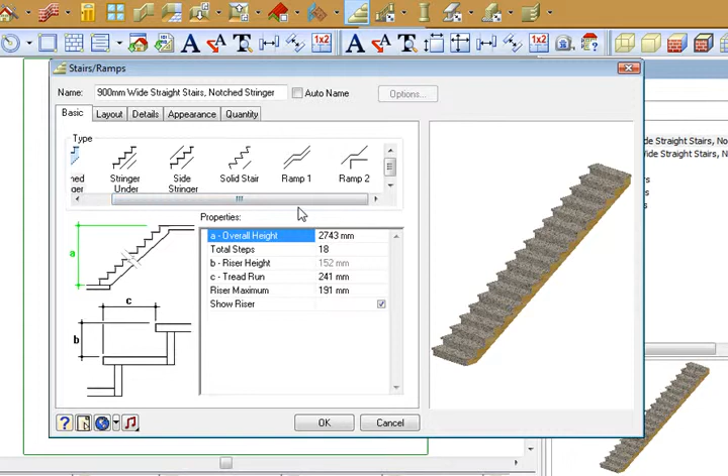So that's where you create ramps. Under the layout you can have a straight flight or a spiral to the right. I find that this list is quite confusing, so if you push the button underneath it you'll then get a series of diagrams that is much easier to select from.

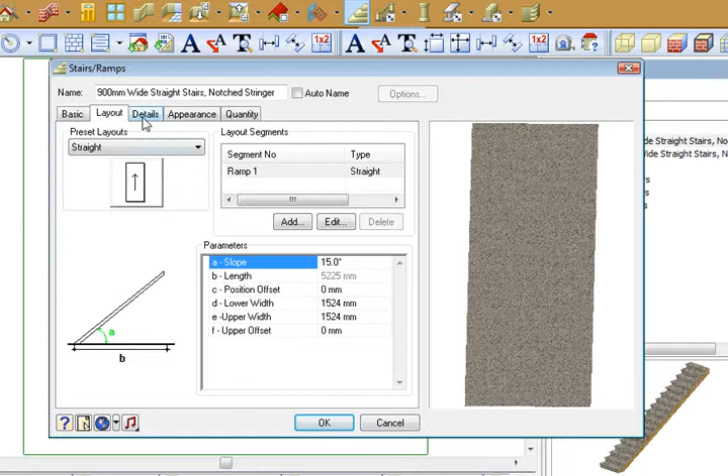The details of the stairs, you can go through and say, okay, I want to show the cut lines or I don't want to show the cut lines. What the cut lines are is how it's sort of cut on your floor plan view. So if I turn those cuts off, it won't appear.

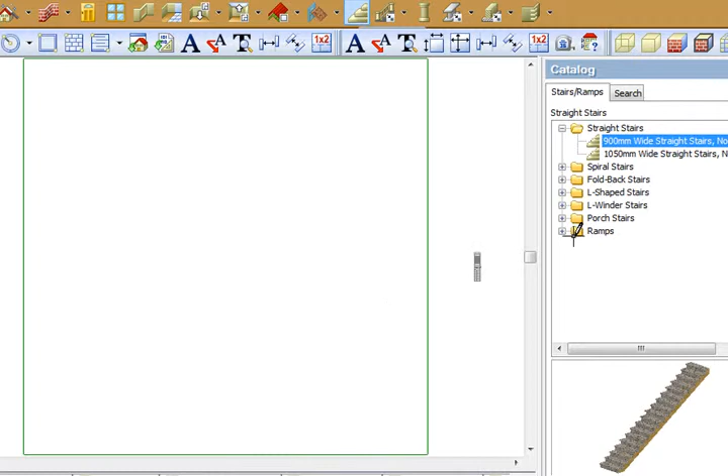So basically, it doesn't matter what sort of stairs you want, you can just bring it in and pick a point on the building, on the floor where you want it. What I tend to do is bring a straight flight in and then go and change it.

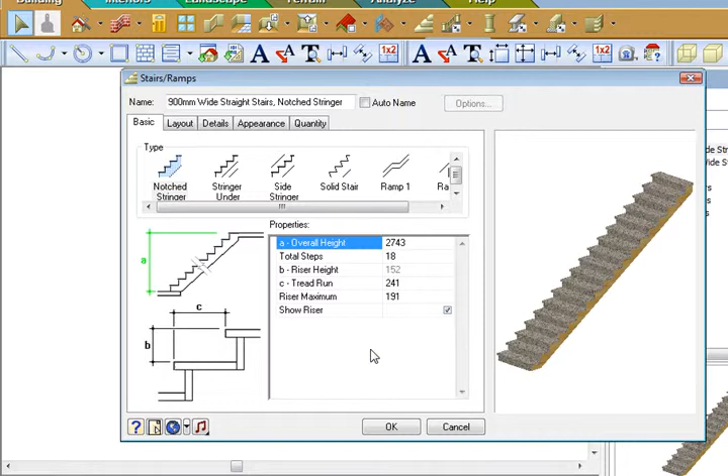So if I wanted to change that to a turnaround set of stairs going up onto a landing and then back up again upstairs, I would go to my layout, select my diagram to go and select the shape I want, and let's say I want this fold back right option. So on the right hand side there's the staircase.

You'll notice there's a gap in the middle, and it's got a number of segments. It's got segment number 1, which is stair number 1, then it has a landing. If I drop the arrow down, then I have stair 3. So I've got 3 segments I have to work my way through.

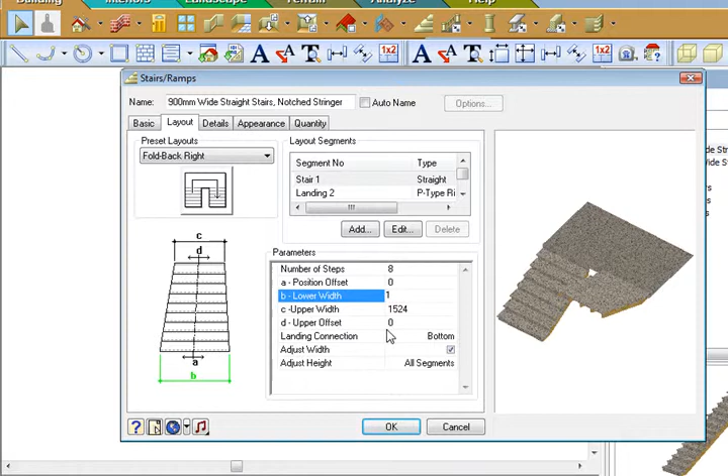So on stair 1 you'll notice that it's 1524 wide. It's just the way Envisioneer puts most of them in. I want that to be a metre. So if I change that to be a metre and then click out of it, see what it did to the side over here?

It sort of splayed the stairs. So I want the top and the bottom to be a metre.

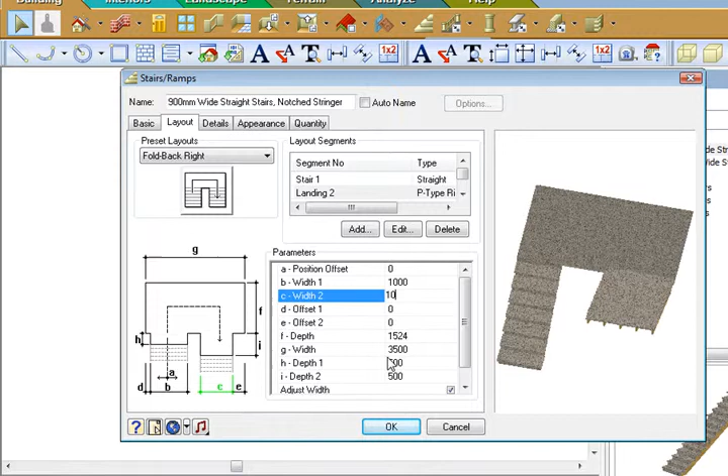Then I go to my landing. There's another 1524. The width of it is C, so I want to make that a metre. I want to make the depth of it a metre. I want to make the overall width 2 metres.

See, I'm starting to build it up. The only thing I've got to do is do that top one, which will come into the 3rd set of stairs, and there it is there. Make that a metre, and there you have it.

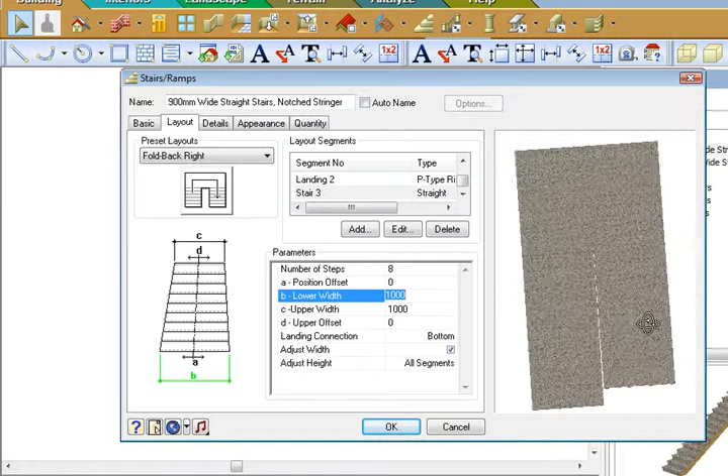Okay, come back to the first one and come back to the basics. I can then say, okay, I want 18 treads, or you want 16, whatever you're happy with the riser.

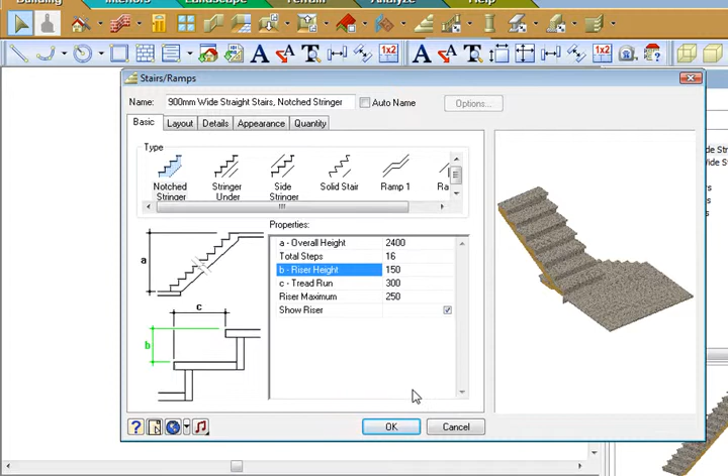So if I go back to 16, notice it's made at 150. We don't want to exceed the 190 here in Australia, so basically that gives me my set of stairs. I'm happy with that. Hit OK, there it is.

Now, putting that into the building itself, I find, let's just go and draw a few walls in here. And if I come over here and draw a U shape, make that internal distance 2 metres.

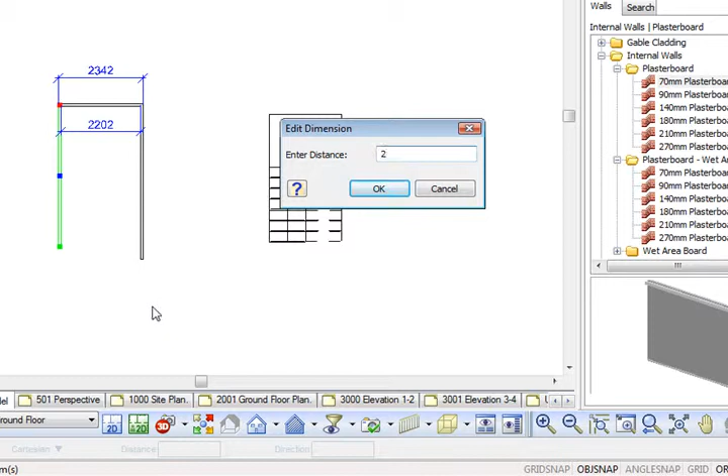Okay, to put that in and go and move it into place, I actually can't get it into place. Alright, so let's say that that is my house.

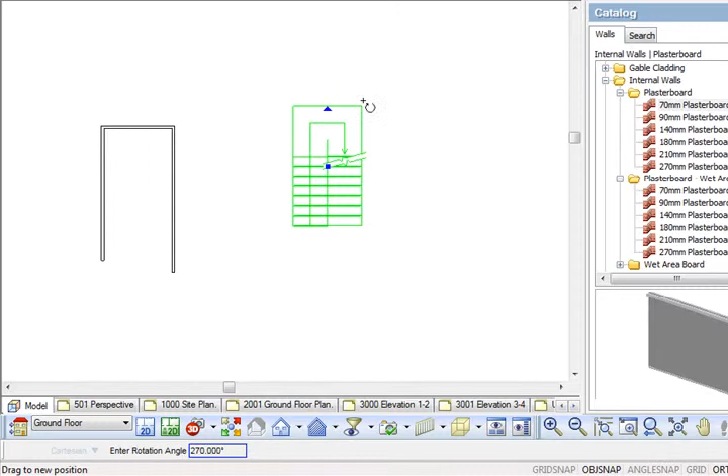So what I tend to do is build my stairs outside or in a room big enough that I can change the size of it. I can grab that and rotate it around, do what I like with it. Then when I'm finished and happy with a set of stairs, I move it into the room.

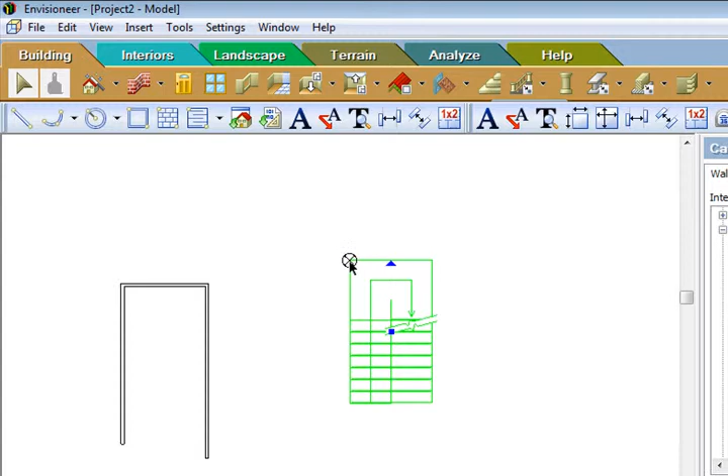What I have to do is come down to my collision, turn that off, and I normally turn my ortho off. Then with my stairs highlighted, I can right click and go move, grab the endpoint, drag it in, and it'll just drop into there, and there's my staircase inside the walls.

Go and turn my ortho and my collision back on, and now you have it. Alright? Thank you.